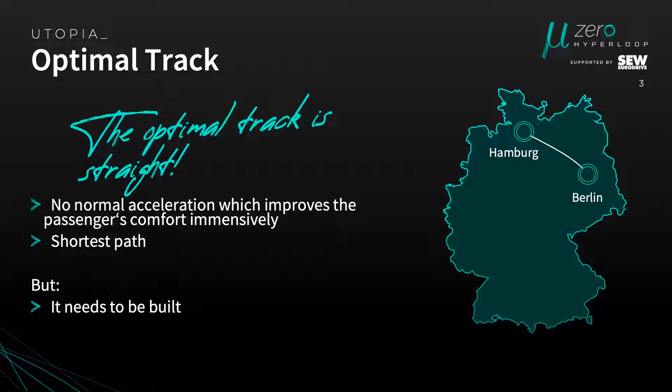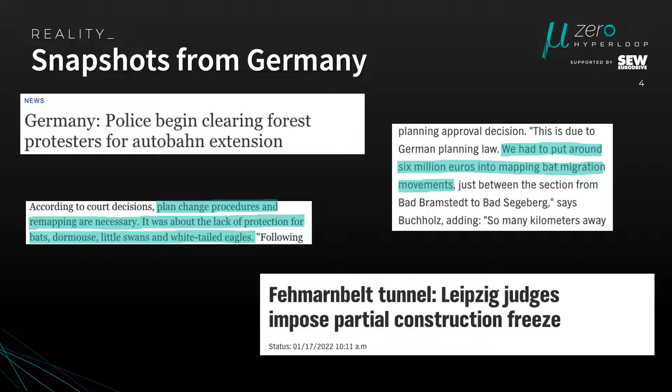So if you want to conclude these articles into some points, what happens when you're building a new route is that landowners are probably expropriated from their property because you want to build your route through it, and they may file lawsuits against this idea or the concept. So you can't really build as fast as possible. I mean, if you're probably in China or other countries where the people can't file lawsuits that easily, it probably works. But in Europe, or especially in Germany, it takes quite some time.

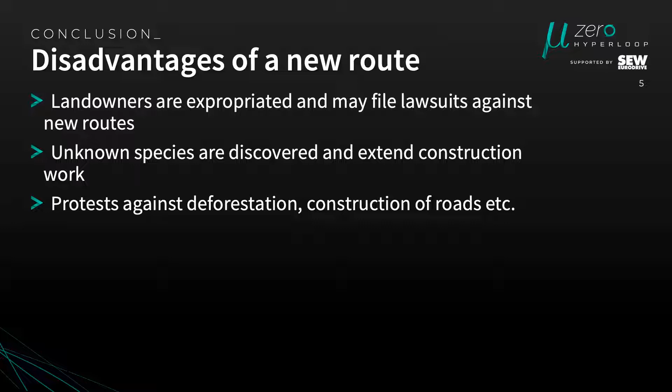You have unknown species that you probably need to repopulate, or you have protests against deforestation, construction of roads, etc. So what we did, we were thinking, why don't we just use existing routes? So they are already built, they are owned by the government, and we can just build the Hyperloop track next to the existing railway.

We don't need to expropriate anyone. The probability of a newly discovered species is quite low. But one big disadvantage is that these routes are not designed for high speeds.

So the idea was to optimize the acceleration profile and then compare it to conventional trains. And so we decided to optimize our acceleration and have decided to do it with basically 3 objectives. So we minimize the travel time. That's probably the most obvious thing.

But if we also maximize the comfort, this reduces our velocity, because the lower we drive, the more comfort we have, and the faster we are, the more energy the Hyperloop consumes. So we have a multi-criteria optimization resulting in this problem. So we want to minimize travel time, comfort, and energy consumption, and have some constraints on this problem.

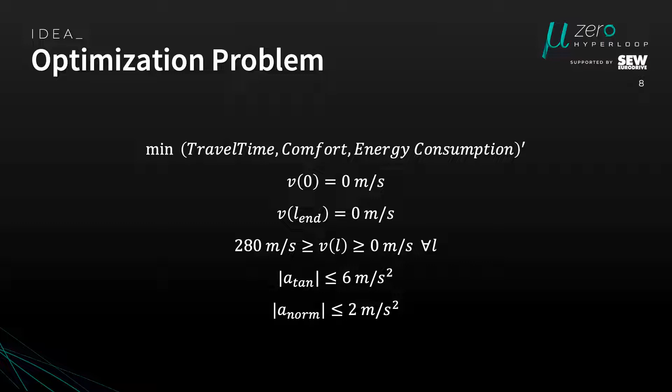All right. So to solve this problem, we had to get data first, and we got the data from OpenStreetMap, where we get the longitude and latitude with the start and end station. But then we had to add the elevation data and then converted it into Earth-centered, Earth-fixed coordinates, basically meaning we have X, Y, Z in meters, so we can optimize over meters and have an easier coordinate system.

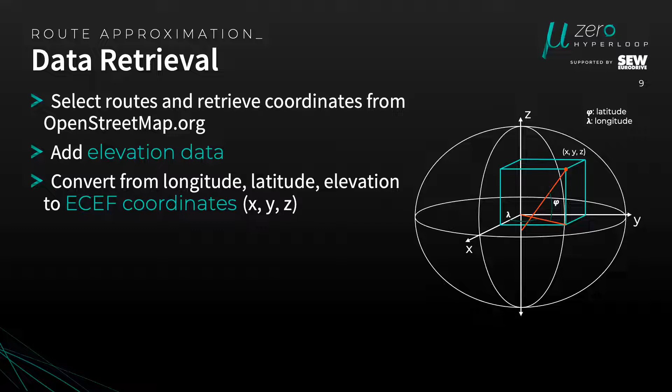All right, so now I'm just talking about Hamburg–Berlin. As I'm from Hamburg, and Berlin is probably quite a nice city, I wanted to talk about this route just to give an example. So the question is, how fast could a Hyperloop be on this route? The route length is 270 kilometers, and you can see it below. Wikipedia has another route length, but that's the one we calculated. I don't know how they did it.

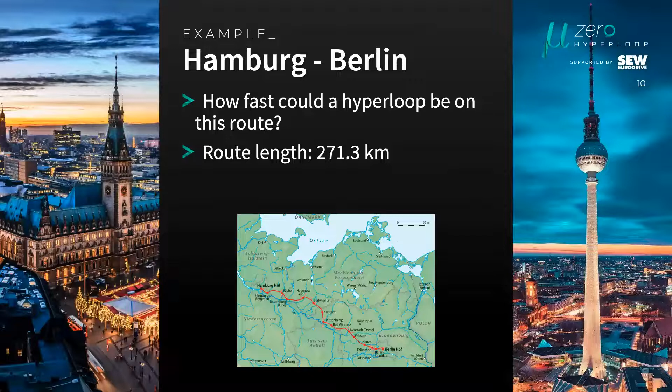So what we did is we got the XYZ data, and I'm only showing XY plots here. It's probably easier to understand, but that's the route. Berlin is on the left, Hamburg is on the right. And if you compare it with this one, you can see it's the right data. So after we got the coordinates and transformed it into the XY plane, we then approximated it with a spline.

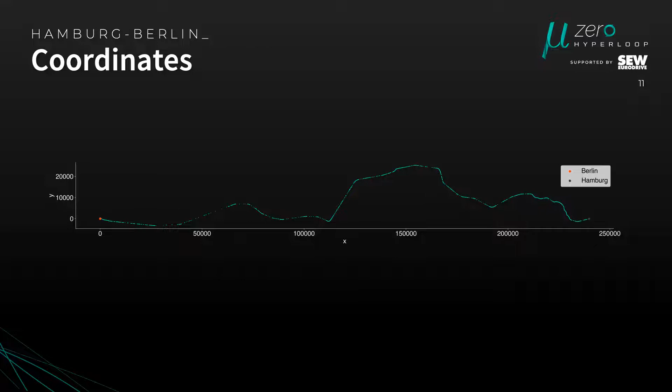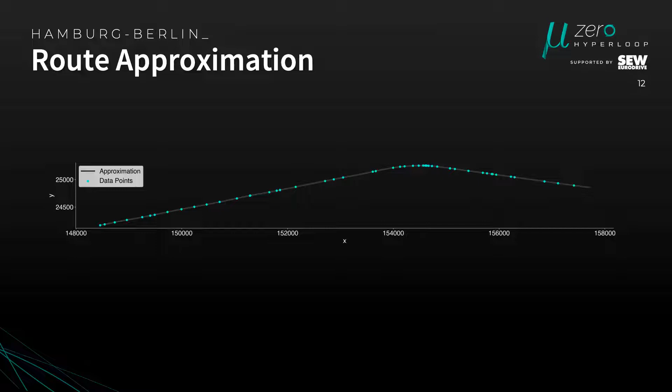Okay. I already talked about the normal forces, which are dependent on the velocity and the radius. You can see the formula below, but we want to know the radius of the route at a given point. So this is just an example where we approximated a point on the spline with a circle, so we can get the radius of the spline, basically. With that, we can start optimizing.

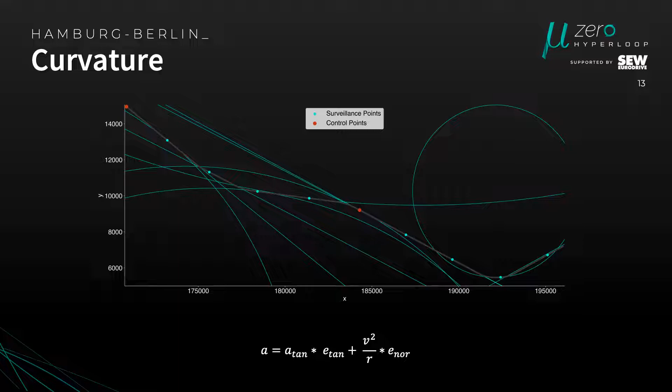What I did is give it a profile where we accelerate quite high at the beginning to the maximum velocity, which is 280 meters per second here, then have a constant speed, acceleration being 0, and then brake at the end. For optimizing, I'm using SciPy, but I'm giving it a couple of starting points where I distort the trapeze profile a little bit. You can see the distortion in the data probably. I hope it's enough DPI.

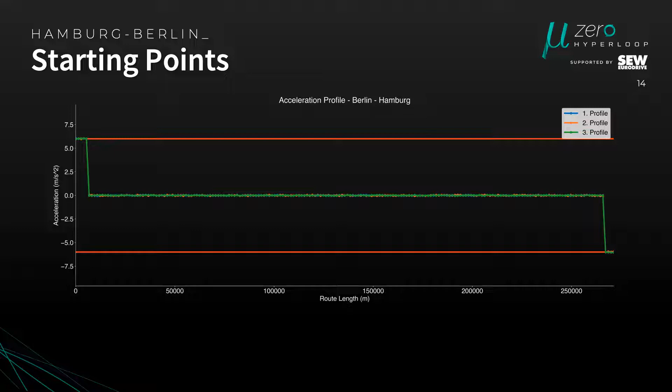So we are handing over quite some acceleration profiles to SciPy, and then let SciPy optimize every single one as a starting point. And to these starting profiles, we have these velocity profiles as well. You can see the constraint that V at the end is not fulfilled. It's the route length below, so that's over the whole route.

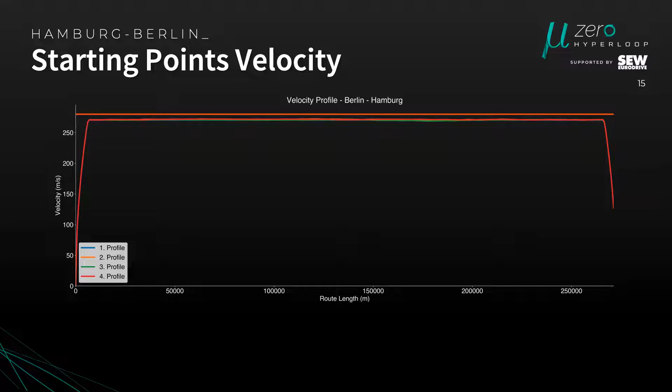But SciPy can change the acceleration profile in a way that the velocity at the end is 0. So that's not a problem. So I'm just going to show you some optimization results. As I mentioned, I'm not finished, but they're probably already quite nice to look at. So we had 4 acceleration profiles, or 4 starting points, and now we have 4 finished optimizations.

And now I'm going to show you the velocity. As you can see, the second profile, the orange line, is quite fast, but as shown in the next plot, it is not valid. That's another reason why we iterate over a couple of starting points, because some of them don't get valid, or just don't work.

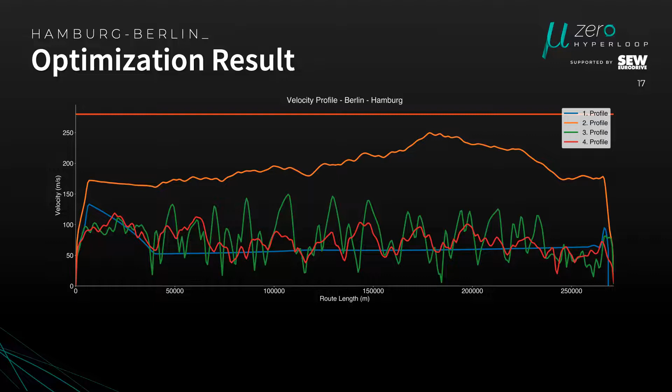Okay, so I'm going to show you why the second profile is not valid. This is the normal acceleration, and you can see the second profile is all over the place, meaning it doesn't fulfill the constraint on the normal acceleration being below 2 meters per squared second. The third and fourth profile do. So I basically picked the ones that are within the constraints and work pretty well. So it's kind of brute forcing, but it's better than nothing.

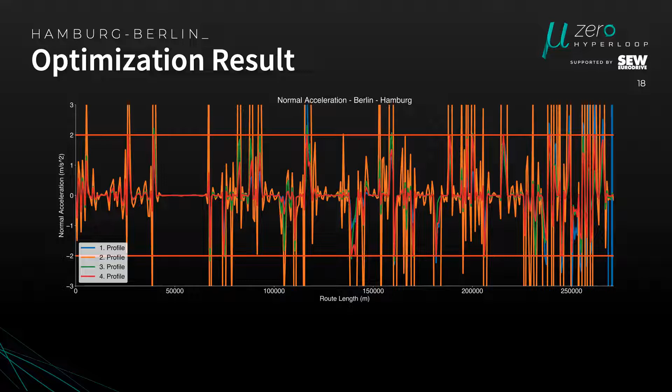And the result I got here, with not many iterations, is that the Hyperloop would need 60 minutes for the route from Berlin to Hamburg, and the ICE in comparison 103 minutes. That's not that much faster, but it's not the optimal combination of travel time and comfort in the objective function. So if I lower the weight for the comfort in the objective function, the result is going to be much faster, but we are still trying to find good weights for the parts of the objective function.

And then I'm already coming to possible improvements. So I constrained the problem at a normal force of 2 meters per squared second, which is quite low. If you think about a sitting passenger, this can be higher. So if a higher normal force is given, the travel time will be faster.

And I need to re-evaluate the comfort metric, because currently the comfort is computed as the average of a sum of the jerk, so the change in acceleration values, and then the acceleration plus the normal acceleration. But this doesn't work that well right now, so I'm going to look into that.

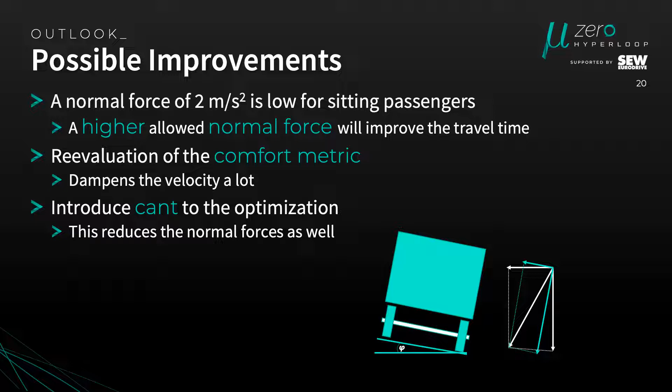Thank you, Justus. I think the first question is already on Slido. Okay. And it is, would you have an estimate how much the solution would cost to construct for the mentioned distance?

Wait, I couldn't understand it right now. Can I open the link on my phone? Oh, you should. The password is already in the chat. Okay, give me a second. Otherwise, I can just say it again if that helps. I think it's the easiest. So if I just look at it, shouldn't take too long. Wait. Transport seminar. All right.

Okay, so I don't have that information, because we are just looking at the potential of the travel time, and not at the costs. No, I don't have it. Sorry.

Okay, and I see a question: did you look into the increase of energy consumption for the new velocity profile? As the energy consumption is not modeled yet, it's not taken into account, but as it's modeled properly, we will take it into account and then find a good solution that fulfills comfort, energy consumption, and the travel time.

The route from Hamburg to Berlin has some parts where I think the high speed limit is 230 or 250 kilometers per hour, and Hyperloops are above it. So that's probably just a regular problem. But it's an old route. We probably should look into Berlin Munich. That's quite new and more straight than the one from Hamburg to Berlin. Yeah.

And then someone asked, did you also look at highways? Are they better for Hyperloops than railways? We didn't look at highways so far, because our assumption is that railways are better suited for high speeds. But with our code setup, it's quite easy to look at highway routes as well, because we just need to provide the start node and end node of the Autobahn, for example, and then we get the full route and we can optimize over it. We're going to look into it, but we assume it's not going to be better than using railway routes.

Today I want to discuss permeability measurements on concrete for Hyperloop tubes. This is a topic I have been working on for 1.5 years, I think, and I've recently also written my bachelor's thesis about it, of which the title is Permeability Measurements on High Performance and Ultra High Performance Concrete for Hyperloop Tubes using Helium Leak Detection. So quite a lot.

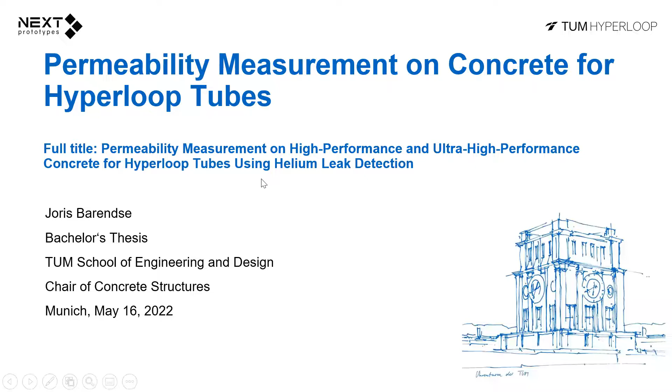I've written this thesis at the TUM School of Engineering and Design at the chair of concrete structures. So I come from a civil engineering background. I would suggest we dive right into it. Firstly, I want to discuss the problem of permeability a bit, then talk about helium leak detection, which we've used, show some series of experiments we've done, and then finally draw a conclusion from it.

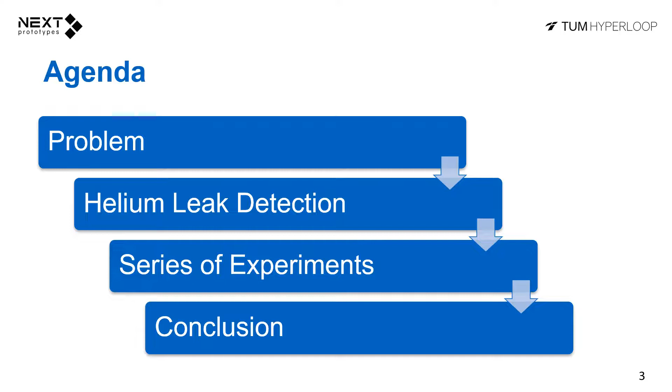So as you might know, the TUM Hyperloop program is currently designing and building a passenger-sized Hyperloop demonstrator, of which the exterior shell, so the tube, will be made out of concrete. And I think you're probably also aware that concrete is a porous material, which means that particles from the outside could potentially move through the shell into your system. And if this flow becomes too large, it could destroy your vacuum. And so you need to adapt your vacuum system to that a bit. And this is what we refer to as leakage. And for us, it was very important to quantify this permeability of concrete.

And for those who do not come from a civil engineering background, usually we define concrete into compressive strength classes. And this is always a C followed by 2 numbers. So for example, here a C50/60 means a concrete with a cylindrical compressive strength of 50 megapascals and a cubic compressive strength of 60 megapascals. And the scale goes up to high performance concrete, and then from C100/115 onwards, it's referred to as ultra high performance concrete. And these last 2 categories of concrete are quite new, and they have a very high density, very high strength, and also very low porosity. So they are actually very well suited for Hyperloop application.

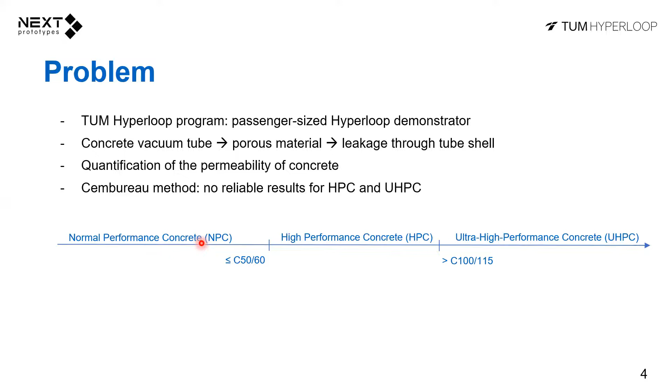The usual way of detecting permeability of concrete is the so-called Cembureau method. According to the literature, this, however, did not really deliver reliable results for the HPC and UHPC concrete types. So we had to come up with another solution. And the solution was called helium leak detection. This is a method that is very common in other industries already for detecting smaller leaks. And with it, you're also able to quantify the total permeability of a concrete specimen and then extrapolate that to longer distances.

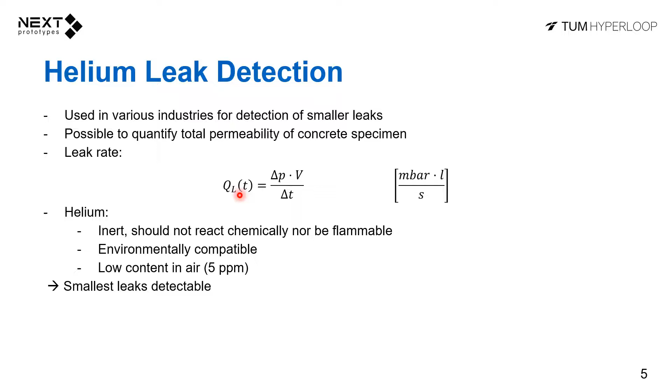Some basics maybe. So what a leak detector does, it determines a leak rate. This is defined as the change of pressure in a given volume over a certain time with the unit millibar liter per second. And we use helium as a tracer gas because it's a very safe gas. It doesn't really react chemically or physically. It's environmentally compatible, and it also has a very low content in air of about 5 ppm, which means that you can really detect even the smallest of leaks.

And the leakage detector calibrates to this background rate. And if then you detect a rise in the leakage rate, you're not really sure if it's from permeation or if it's just because the helium leaked out of it. So it needs to be really airtight. The other reason for it is the fact that we don't want air from the outside moving into our vacuum, because that changes the sensitivity of the measurements as well.

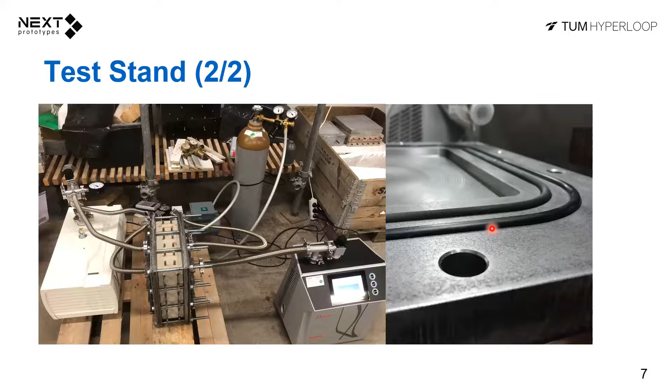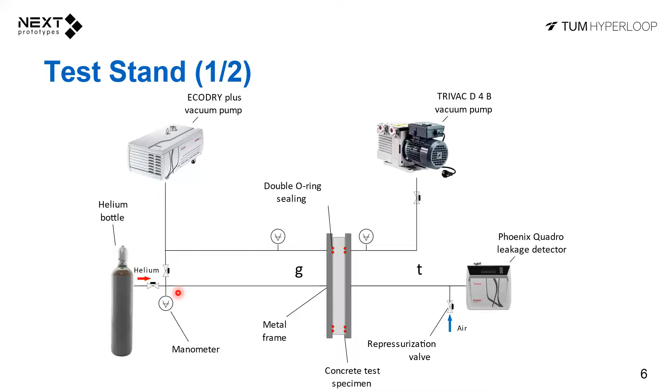And then because there is a pressure difference, the helium will start permeating through the pore space of the plate and will be detected on the other side by the leakage detector. That's the basic principle. And you can actually quite well compare this to a sponge that you fill up with water. After some time, the sponge will be saturated, and there will be a continuous flow of water out of the sponge. And the same happens with your concrete plate as well. You apply the helium to it, the pore spaces will get filled, and there will be a continuous flow out. And this flow we refer to as maximum permeation.

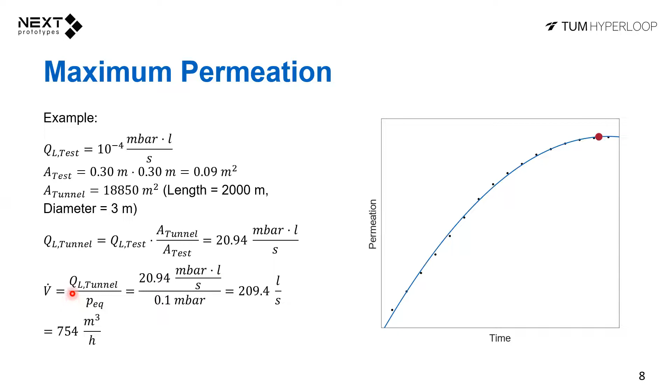And if we have an operating pressure of 0.1 millibar, this is just an example, you would need a constant pumping capacity of 750 cubic meters per hour. You need to have a vacuum system that's really able to pump down this volume at all times. Now, as we've already seen, of course, with rising area, the permeation also rises. This is because there's simply way more contact points. On the other hand, of course, with increasing shell thickness, the permeation decreases. This was not really confirmed in our tests.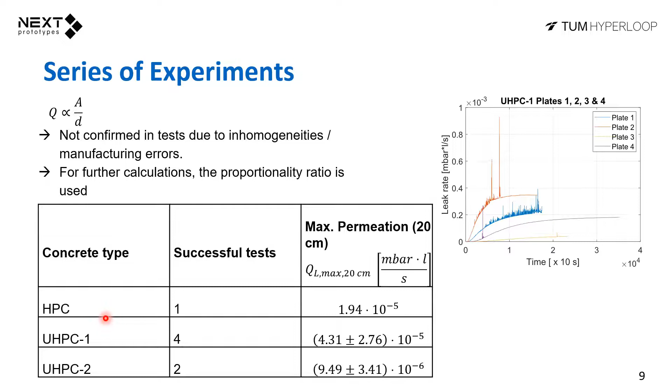We however did use this proportionality ratio to calculate up to a 20 centimeter thickness plate, because this is from our point of view a quite typical shell thickness for a concrete tube. And as you can see here for the tested concretes, so an HPC and 2 UHPCs, the maximum permeation is all in the range of 10 to the power of -5 millibar. And this is really much lower than we initially expected. So quite some good results.

If we would again then take this leakage rate, for example, now for UHPC1, the real leakage rate we've measured, and then extrapolate this to a track of 600 kilometers, so roughly Munich to Berlin, at an operating pressure of 1 millibar with a radius of 2.1 meters and this shell thickness of 20 centimeters, we would need a pumping capacity of 14,000 cubic meters per hour. And this can be provided by 12 dry vac pumps of this type or 23 of this type. These are pumps from Leybold, just as an example, but as you can see from the power consumption already, that's nothing for such a long track.

So this leads to the conclusion that the concrete leakage is not going to be a big deal if we are able to manufacture the tubes in a good way, so without cracks. Probably the biggest challenge is going to be to pump down these large volumes in an acceptable time with as few pumps as possible. And to pump down 600 kilometers of tube, you would probably need hundreds of pumps to do this in an acceptable time. And of these hundreds of pumps, you would then only need 23 pumps to maintain your pressure.

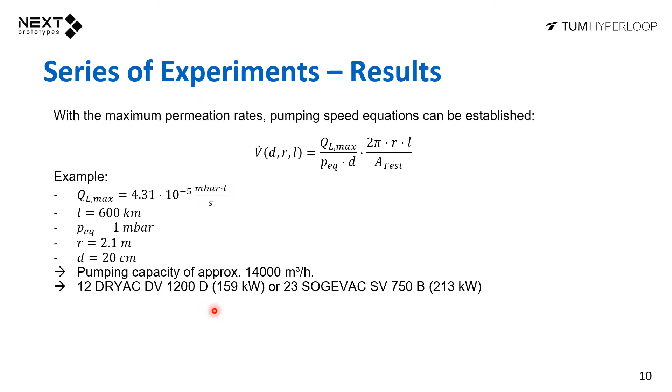Maybe I can go some slides back here. 7 successful tests in a period of 1 year of testing is not that much. And this is due to the fact that the measurements just took really long. Some measurements took weeks. We tried to use an overpressure as they use in the Cembureau method I discussed in my introduction as well. They use an overpressure of 1.5 to 3.5 bars, and with that you're able to force the specimen to a result faster.

We were unfortunately not able to do it with our mechanics because we had some glued connections in there, so we need to make it more robust to have more testing in the future. And most importantly, lastly, of course, is going to be the demonstrator, because with the demonstrator we can really determine the total leakage of the system, including the segment joints.

We are never going to have a monolithic 600 kilometer tube from Munich to Berlin. This tube will always be built out of various segments that will be stuck together and connected via joint sealing. And we can expect some leakages there, and maybe these leakages are higher than the concrete. So that's definitely something I'm very much looking forward to working on in the team.

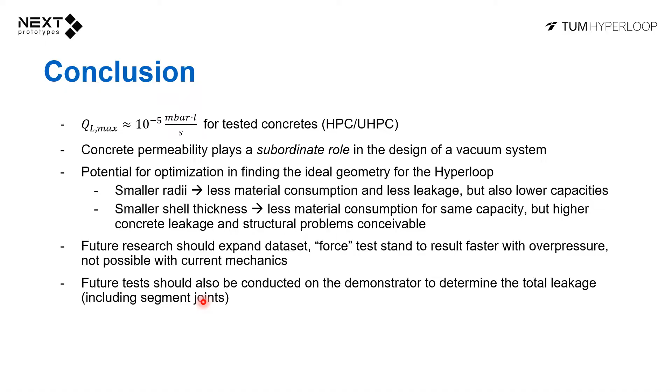Great. Thank you very much. Nice talk, nice insights. Good that you're on time because we have quite a few questions on the topic. Seems to be pretty interesting for the crowd, for the people.

Let me start. How do you spot a leakage without a helium leakage detector? For example, during running the facility in vacuum, which techniques have you looked into? This is something I cannot answer right now. The thing is, if everything is constructed the way it should be, then it's not going to be a problem at all. But as soon as we have a crack somewhere, your vacuum can be destroyed pretty easily, pretty quickly.

That's definitely a thing we are looking at the moment. You can do this with ultrasound systems. That's something we are looking at. I think heat is an option as well, but this is something for the building phase. So I really can't answer too much in detail on that yet, but it's important to look at because during the construction phase there can always be minor accidents and cracks, and then we should really be able to find the leak. Otherwise, the system just doesn't work.